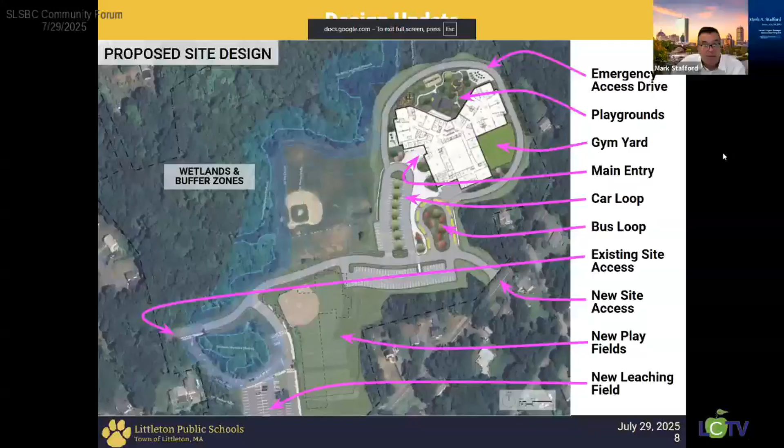This is the outline of where the existing school is currently. During construction, what's going to work out really well is that where the new building is going to be built will be completely cordoned off and safe from the existing school.

Thank you, that's a great point. The beauty of putting the new school away from the existing school is that we don't have to disrupt the students during construction. We're scheduling it so the kids can move into the new school and be entirely moved over there, with the drive aisles and everything ready to go when they move in, and then we'll demolish the existing building and restore the fields.

I think Justin has a question. Hey Marylee, with this up, a question that always comes up is about enrollment and where a possible addition could go—could you talk about where the addition would hang off this building in the event we needed to add on in the future? Would we lose the gym yard? No, you would not.

The plan is to attach the addition here. Because of the wetlands buffers and proximity to neighbors, this is the most buildable part of the site. It's also fairly flat, so there wouldn't have to be a lot of earthwork. We're not planning any play equipment here—this is actually an outdoor learning space, just paved with some site furniture, so that really paves the way for an addition to pop in here. There's a stair right here, so we don't have to worry about egress, and there's enough room for a four-classroom or more addition at that location. Four classrooms is approximately 100 more students.

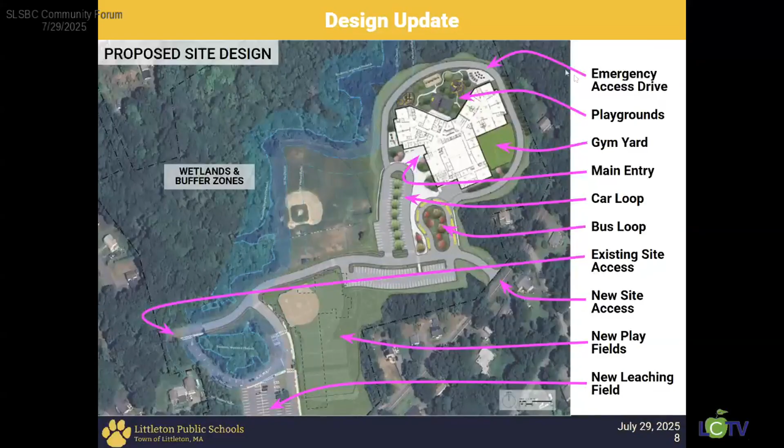Here are some visuals of the exterior of the school. This is an aerial view of the front entry—you can see the car loop here, the bus loop over here, and this is the main entry plaza. From more of a person's eye view, this awning directs people to the front door and brings the scale of the building down to a very child-friendly height. These are preschoolers to grade 2, so kids under the age of 8.

It's very important to make the building feel welcoming, not intimidating, like a really fun place for them to go every day. Here's a view of the back of the play area.

We are intending to have a wide variety of play equipment, including a dedicated preschool play area with age-appropriate equipment over there.

We're intending to put in a basketball court, half-court basketball, and on the other side wall ball. That's something the kids have right now and really enjoy playing, so it's a fun addition.

We're also intending to put in some play equipment that is wheelchair accessible. All of the playground equipment is considered accessible, but not every piece is considered wheelchair accessible.

So what we end up doing is choosing equipment that a child in a wheelchair can just roll directly onto and participate in the play.

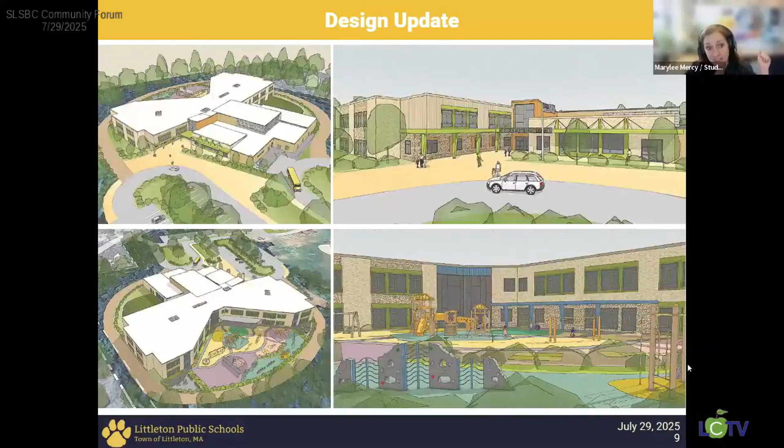Here are some floor plans. Over here is the first floor, this is the main entry. Off of this lobby area, you have a secure vestibule and the administration area, so we can really control who has access to this building.

We also have direct access to the cafeteria and the gymnasium, which are the two main spaces that will be available for community use outside of school hours.

This entire lobby can be closed off so the rest of the school is not accessible. So if you have an event in the evening, you could have the cafeteria and/or the gym, plus plenty of toilet rooms for everybody to use, and the rest of the school remains secure.

Beyond that, it's organized with the youngest children on the first floor. We have pre-K over here in a sort of self-contained preschool area, and kindergarten over here as well. These spaces have direct access outside to the play yard and outdoor learning.

Upstairs we have grades 1 and 2, as well as art and music. We've looked really carefully at the circulation about how kids are going to be moving through the space.

Making sure it's as efficient as possible, because remember, little legs, it takes a while to travel places, and making sure there's not congestion during the day when you have a lot of kids moving around between classes.

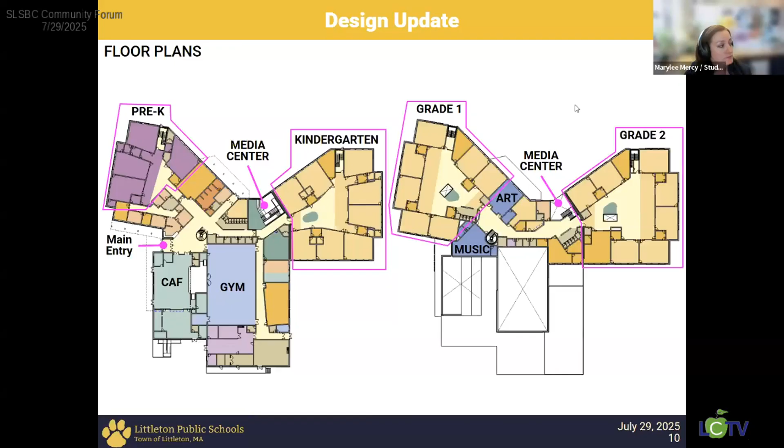Each of the grade levels is arranged into what we're calling a den. This is classrooms surrounding a central collaborative area. Each of these classrooms is fully contained, and they also include a wide sliding door that can be opened.

When it's open all the way, the classrooms can really spill out into the shared collaborative area. This allows the classrooms to feel much larger than they actually are, and allows us to replace circulation space with educational space.

Instead of having just a dedicated corridor only used for circulation, now we have this collaborative area where you can have a huge variety of different activities taking place at any one time. There is an area sized to fit every single kid in the entire grade to sit for one special event.

Maybe you have somebody come in to talk about a special science experiment, or bring in animals, something like that. But it's a way for the entire grade to gather together right here in their neighborhood.

There's also sinks for science and STEM and art activities, as well as an area for books and reading. This is, again, spilling the media center into the grade level neighborhoods to bring books even deeper into the school and make them more accessible to the kids by having them right here in their neighborhood.

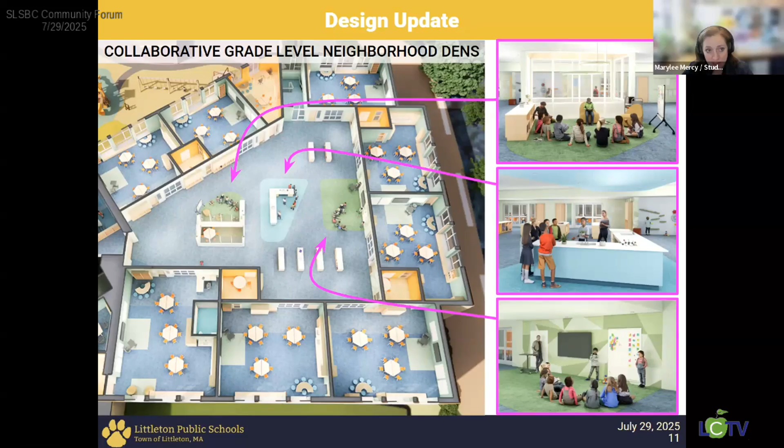We also have these little yellow rooms. These are breakout rooms, for when somebody needs small group or one-on-one instruction. Instead of having to travel all the way to the specialist, the specialist comes here, takes the kid right into the adjacent room and gives the lesson. It's called a push-in model, so the specialists come to the children, making kids as integrated into their classroom as possible and get the supports they need without having to leave their peers.

A quick comparison of what this does in terms of size and efficiency. This is a comparison of the existing Shaker Lane School right now for one grade level. You have all the classrooms and a special ed room lined up on a single corridor, and we measured the distance from the most distant classroom to the rest of the school. We compared that to if we took the classroom space and all the different spaces, collaboration spaces, toilet rooms, support spaces, everything listed in the MSBA guidelines, and put that in a traditional classroom layout with a corridor. We also calculated the distance from the most distant space to the rest of the school. Then we compared it to the DEN model, which has all the same spaces, measuring from the most distant door to the rest of the school. The travel distance for the existing school and a traditional layout are approximately the same, but with this DEN layout, it becomes much shorter.

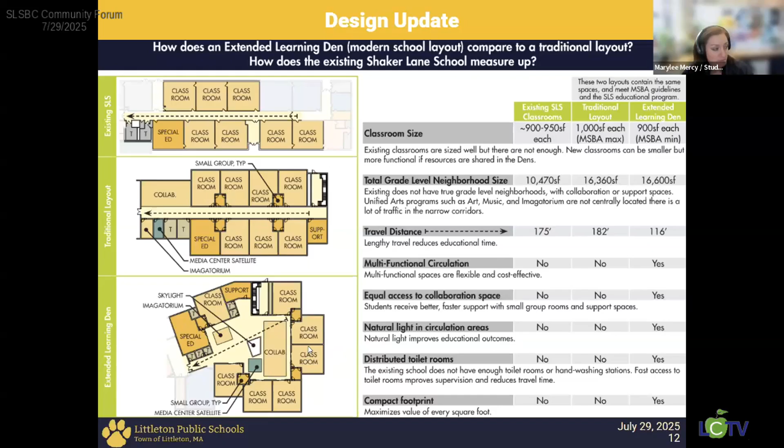So these kids are spending way less time just transitioning between spaces. We also have the square footage comparison. The existing Shaker Lane School is quite a bit smaller than it really should be. If you compare the traditional layout of MSBA spaces with the DEN layout, they're only about 240 square feet off of each other. So this is a really efficient layout that doesn't add to the square footage. We're trying to keep the size down, keep it as efficient as possible, and maximize the use, because now instead of just a corridor, we have all these activities that can take place in this shared area.

We also have a media center classroom over here that most of the time can be left open to make it feel like a large cohesive media center, but at times it can be closed off for classroom activities or professional development. This is another example of finding ways to make square footage serve double duty, so you're really getting as much value as possible out of every single square foot.

I would pass it - is Michelle here yet? Pass it to her or to Kelly? Oh, hi Michelle, she's here. Hi, hi everyone, thanks Marylee.

We currently hold our ELL classroom - multilingual learner students have their classes on the stage in the cafeteria between lunch services. When lunch is in session, we have to take those students who need services and triple them up with 2 other educators, so we have 3 people in a classroom during lunch periods.

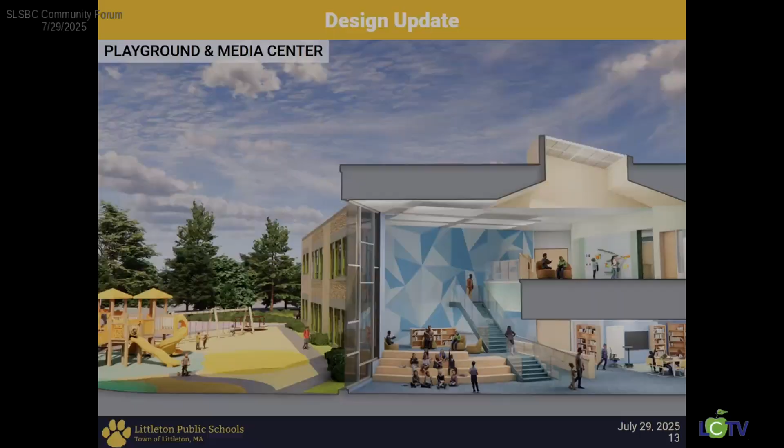So this is just a design comment. You had said you wanted to maximize the amount of space within the building for different functions. For this one, I had two comments: it seems a little out of scale to me, with these little kids having this big high ceiling. What if you extended the mezzanine level over somehow and brought down the scale there a bit? I don't mind that there's a differentiation between classroom height and something like this, but as a designer it seems a little out of scale, and maybe you could capture some of that space you had talked about a few times in the presentation.

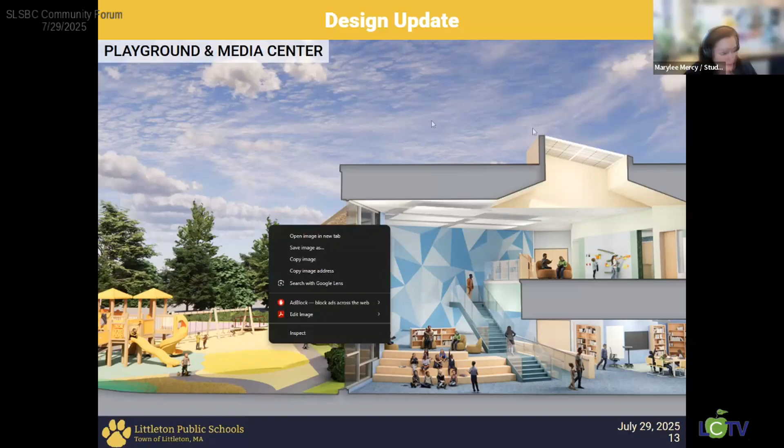Yep, that is another good question. Let me see if I want to go to the plan view of this, so I think it's a little easier to talk about.

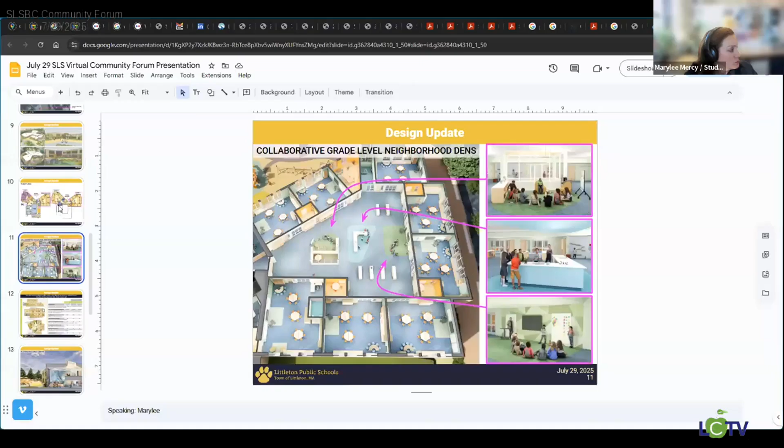Okay, but actually I'm gonna do this so I can zoom in here. Here we go.

All right, so in the media center here, first I want to talk about how all of this space is useful.

We have the ramp, which is going to be designed with a lot of sensory activities on the wall and some playing with textures and transparencies and colors, so that moving through this ramp is a playful and sensory rich experience. With these children being so young, play is a super important part of their education and their experience in the school.

So adding playful elements like this contributes to their education. Next is these risers, I guess you could call them, over here, for seating. There will be a screen on this wall so they can show movies or educational videos or anything like that, or even read aloud books and have the pages of the book displayed on the screen.

Providing seating here helps the kids have a better view of that and sort of creates a little story corner. These are also another playful element, allowing kids to climb on them and improve their gross motor skills and get the wiggles out by being allowed to move in a safe and controlled environment.

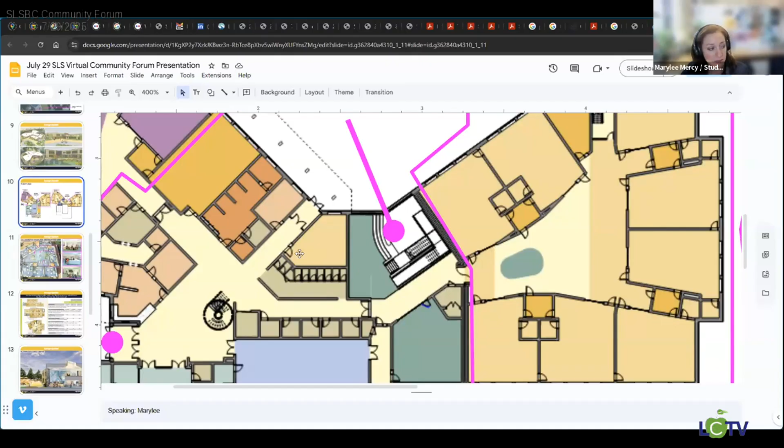And then when you move upstairs here, the area that is open to above is a pretty small footprint. One of the things we spoke about in early design planning was that it was important to have something really cool and special in this school, something that the kids can be proud of and say, this is the cool thing that I have at my school that no other school has.

So the large wall here, we've talked about various types of murals that could go on that wall, including maybe a map of Littleton or a map of the world, so that children can understand their place in the community and in the world as a whole. There's not really any other place in the school that has that large of a surface for that type of large scale mural.

We also have this large balcony area up here that is large enough for more furniture and still have plenty of room for people to move around. So really the benefit of having this as a double height space, the cool factor, the ability to have a large mural, and these large windows that bring light deep into the space that otherwise would be pretty closed off, outweigh the small amount of square footage that's lost due to the double height space.

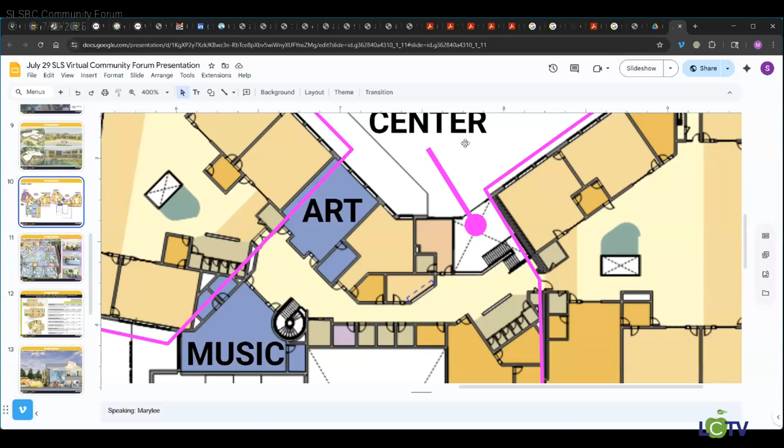My last one, I'm sorry to take up so much time, but if you're trying to present this to the town, I think one thing that could help is at the very beginning, you showed other towns doing similar projects and how expensive they are. But all the towns you showed, except for the one out in Western Mass, were really a lot bigger than Littleton. So I think if you could find some towns like Burlington, Stoughton, Dedham, these are all really big towns, Reading, Wilmington. I don't know how many kids are in Leominster.

I think if you can find some other examples, just a suggestion, if you're trying to pass this, trying to make the case at town meeting, you might want to mention how many students are in these school districts to bring more in line.

That's a challenge we always have, trying to find schools similar enough to make a meaningful comparison. That's why we use dollars per square foot, because regardless of the size of the school or number of kids, it's a commentary on the materials chosen and the construction done to make it as efficient as possible. Unfortunately, these are all the schools happening right now. Anything earlier isn't really comparable because of inflation since then. This is all of the MSBA projects.

Okay, I understand. Thanks. Well, thank you for listening and answering all my questions. I appreciate your time. Of course, thank you.

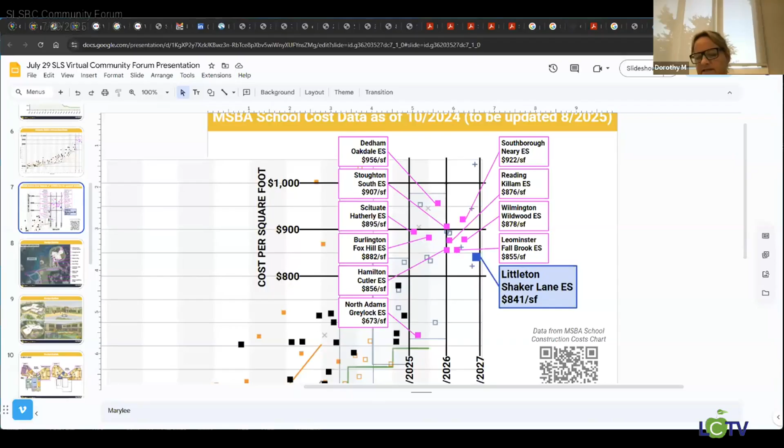Because I can't see how many people are on the call, can you tell me approximately how many residents are on the call? This has been an issue of concern with regard to getting the word out, so I'd appreciate understanding that. We have 10 attendees, including yourself, Rob.

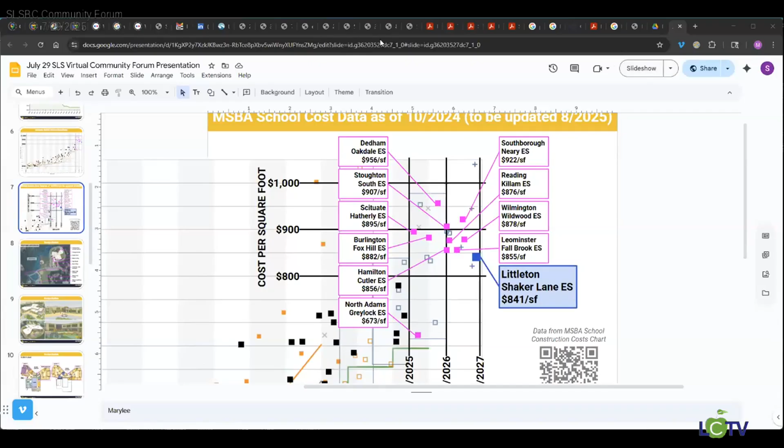Another question, and this may be too difficult, but do you anticipate when FinCom and others will be requested to take votes to express support, so it's included in the town meeting report pertaining to the article to approve the school building project? Is there any timetable? Part of this is getting awareness of different organizations within the town who are on board and supporting this proposal. It's like select board, FinCom, those are the easy ones. Obviously the school committee as well will be expected to take a vote and express their support.

I can answer that for you, Rob. Once the meeting with the MSBA is done and costs are finalized, so we can come up with what that tax impact number is going to be and the numbers we'll go to town meeting with, we'll have a meeting between the select board, finance committee, and school committee to go over those costs before we put the articles together for town meeting.

September's going to go by pretty fast, so it'll probably happen sometime during September. We'll get the boards together, and then we're right into October. So we'll have two months after we get those updated costs from MSBA to really get support going in the town with the boards and get the votes going.